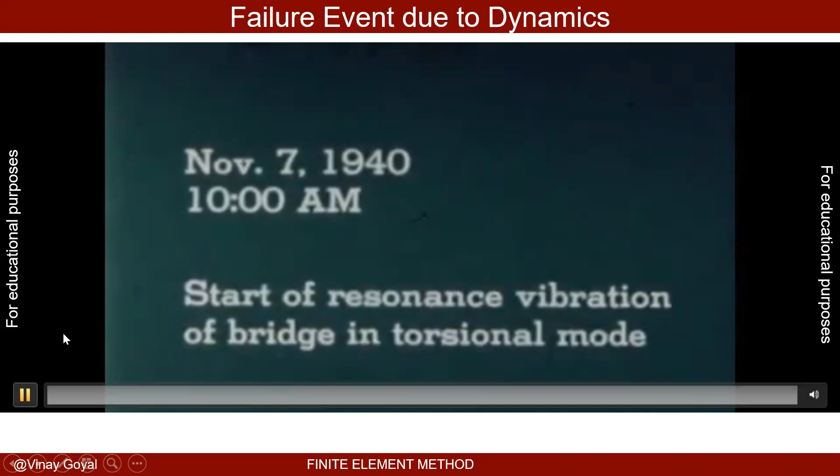And here what I'm going to do is talk about the Tacoma Bridge, which collapsed due to a flutter event. So let's look at this video really quick. And what we're going to see is a resonant vibration of the bridge in a torsional mode. In this case, the Tacoma Narrows Bridge collapsed as it experienced winds of about 19 meters per second, close to

Despite all this motion, the center part of the bridge was motionless, while the other two halves continued to twist in opposite directions. What we notice here is that there's a drastic torsional motion, which was started by a failure of a cable, and that basically increased in size. These amplitudes increased in size until cracks developed and the entire bridge crashed over.

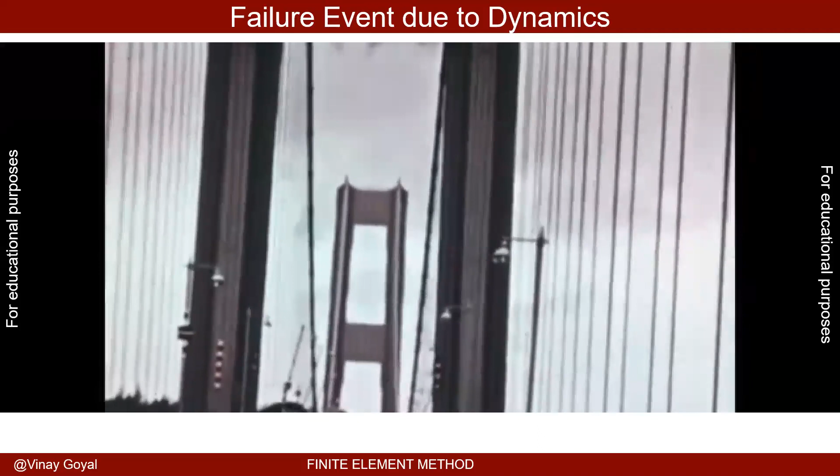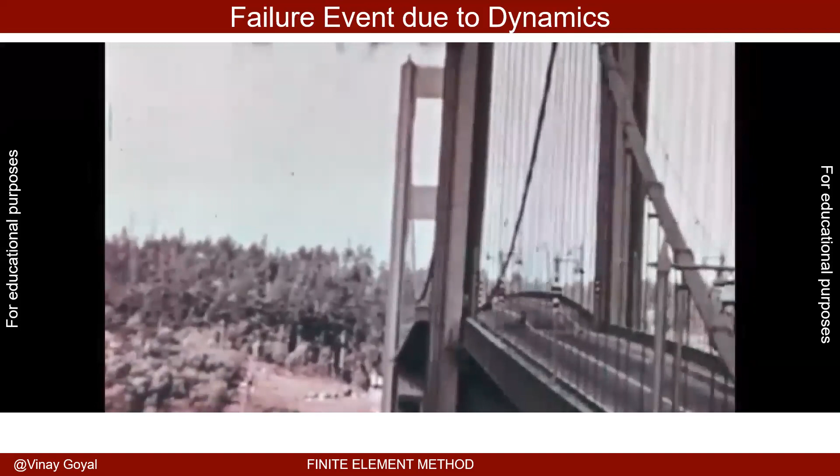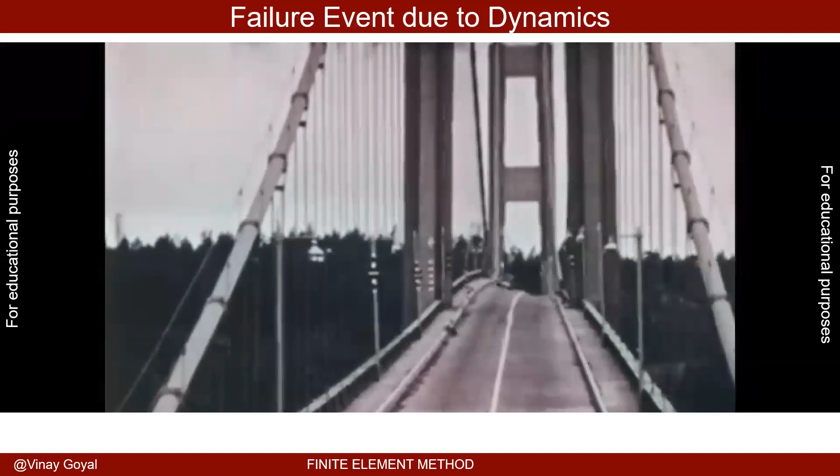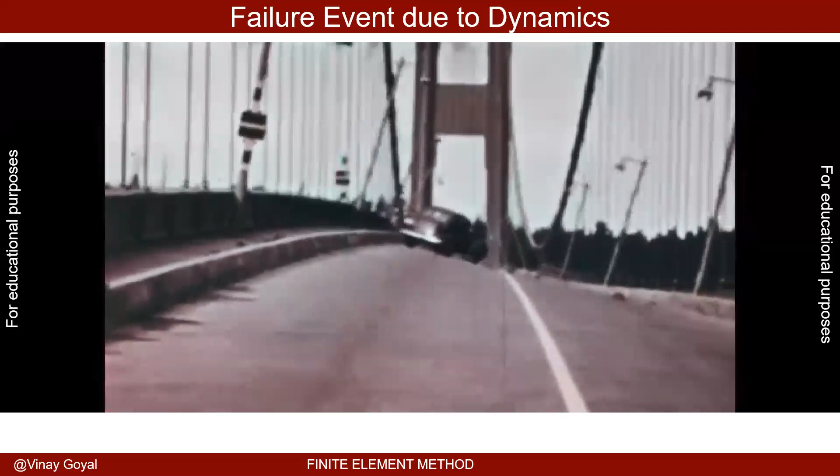Very, very powerful event that demonstrates how wind can couple with frequencies and dynamics of the bridge. And when they coupled, it can cause a resonant condition. In this case, what people have found is that wind-induced oscillations can occur and can be quite dramatic. There have been wind tunnel test experiments that usually can explain this type of failure. And this is what we call an aerodynamically unstable event. And this is not a new problem. It has occurred in other types of structures, but at the time, this factor was not considered here.

So what is the physics? You really have these vortex events that have frequency and that occur at certain frequencies or cycles per second. And the bridge will have a dynamic characteristic that can be described in terms of frequencies and mode shapes. And in essence, what we're talking about is the natural vibration of the structure due to excitation.

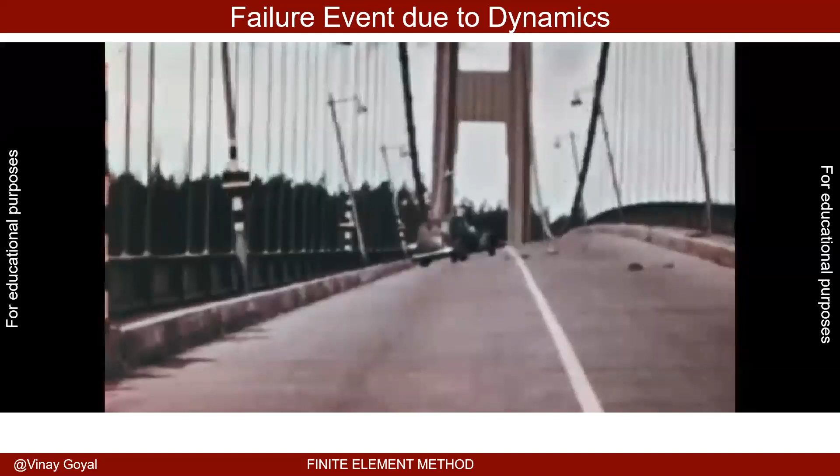Let's talk about the dynamic analysis. So we'll be discussing the transient dynamic analysis, but we're going to look at other methods of doing it because what we had discussed was the transient dynamic analysis with direct time integration. That's the very previous lecture. We can discretize the spatial domain using finite elements and integrate the equations of motion directly from some load time history. And I demonstrated that using the Newmark beta method.

We can solve for deflections, velocities, stresses as a function of time. The benefit of this approach is that it predicts the structural behavior due to time-varying excitation. The transient load excitation is explicitly defined in the time domain. It allows definition of applied forces and/or enforced motions and can be modeled nonlinear. It can model nonlinear behavior such as contact and plasticity.

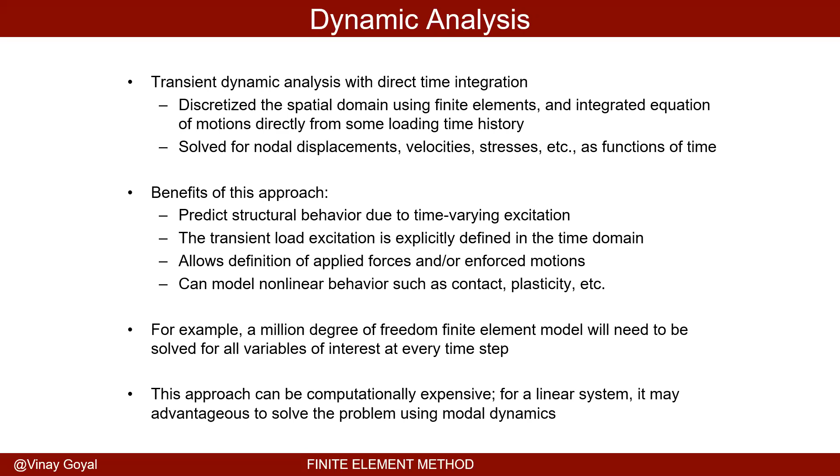For example, a million degree of freedom finite element model will need to be solved for all variables of interest at every time step. That's what we saw. So if I have a million degrees of freedom structure, I'm going to have to solve for all those variables as a function of time. And that can be quite computationally expensive. For a linear system, it may be more advantageous to solve the problem using modal dynamics. But before I can tackle that, we really need to understand the idea of frequency modal analysis.

The frequency modal analysis is a free vibration eigenvalue problem, and it allows us to determine the natural frequencies and normal modes. And then we can determine the transient response, and I'll discuss that later. We can actually determine the transient response using these normal modes. The motivation for free vibration problems is that it allows us to verify stiffness requirements. You may want to stay away from certain frequencies. And so you could use that. Modal identification and correlation to test.

So you have a representative model of the physical system, and you want to determine whether the dynamics of that model correlate well with the testing. To assess the dynamic interaction with another structural component. So I want to make sure that I don't have this coupling effect that we just saw in the bridge example. And we want to make sure we don't have a problem where, say, the frequencies of the forcing function coupled with the fundamental frequencies of the structure, and that in turn causes a resonant condition that can cause failure.

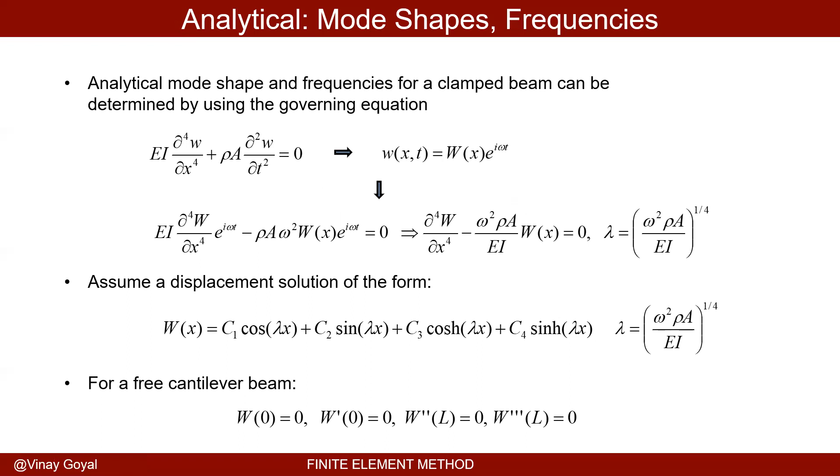So normally when you're trying to find modal frequencies and natural frequencies, you're not applying a force. You don't have a forcing function applied to it. You're trying to find the free modes of vibration.

So I don't have the distributed load here. This q is not here, and I'm not going to apply any forces at the boundaries. First of all, the boundary conditions at x equals 0 are such that v at 0 is 0, v prime at 0 is 0. But the shear and the moment are also 0.

So this whole thing vanishes, and I get this equation right here. So very simple equation, no distributed load, no forcing functions applied because I'm looking at the free vibration problem. And then the boundary conditions are such that all these boundary terms disappear because I have a clamped condition. If I want to examine a simply supported condition, for example, where it's pinned, then v at 0 is 0, v at L is 0, so this goes away. And then I have no moments applied, so this is also 0.

So it doesn't matter what you do in a free vibration problem, you're going to end up with an equation that looks like this. Very simple equation. And so that's the weak form from Galerkin, and I derived that in the previous lecture, and that's why I'm not doing it again. And notice how I can now use separation of variables. What I'll do is w tilde, the approximation function, will be equal to separation of variables that we'll be using. And N bold is only a function of x.

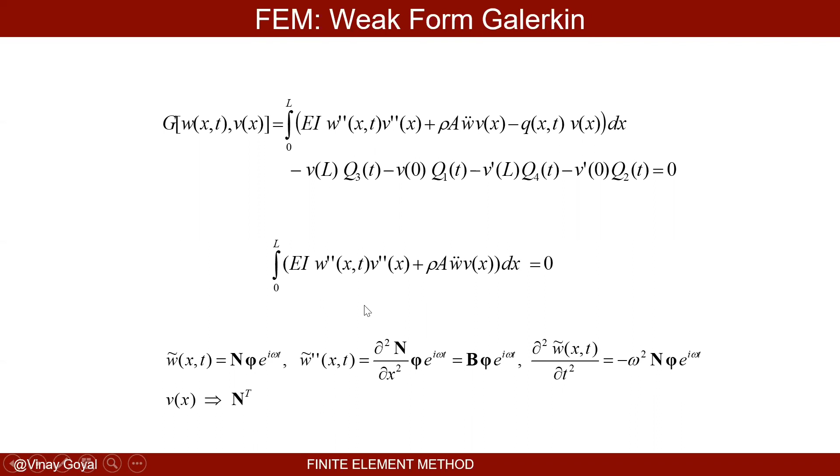And then in e to the i omega t, this is B bold, and then I have phi e to the i omega t. And the second derivative of w tilde with respect to time is minus omega squared N bold phi bold e to the i omega t. And so that's because the second derivative of w with respect to time is only applied to the e to the i omega t, and so that just results in this. And then anywhere I see v, I'll put it as N bold transpose. But I have a second derivative here that I need to take, so that'll become B bold transpose when I put it in there.

And so let's see what we got. We plug in the following approximations. I had to calculate this, and so I'll just plug it in. We just plug in these expressions. So this expression goes in here. This expression goes in there. That becomes B bold transpose. This expression goes in there. When I do all those substitutions, e to the i omega t factors out. And phi bold also factors out. You can see that here. And then omega squared does not depend on dx, so that can be factored out in this manner.

And notice how this is the stiffness matrix and this is the mass matrix. And note again here that phi is not a function of time. These are the nodal values that I don't know about. And notice that here phi is not a function of time and does represent the shape of the system. Okay, so that's the difference between what we did in the previous lecture, where I separated the variables. So it was w tilde of x comma t, N bold times a coefficient, nodal unknowns, which also depend on time. Here, I have taken phi bold and made it independent of time by doing these separation of variables. Now, phi bold does not depend on time. Big distinction between what we did before in the transient analysis versus what I'm doing here. So phi bold, again, has no dependence on time and no spatial dependence either, because the spatial dependence is taken care of by the shape functions.

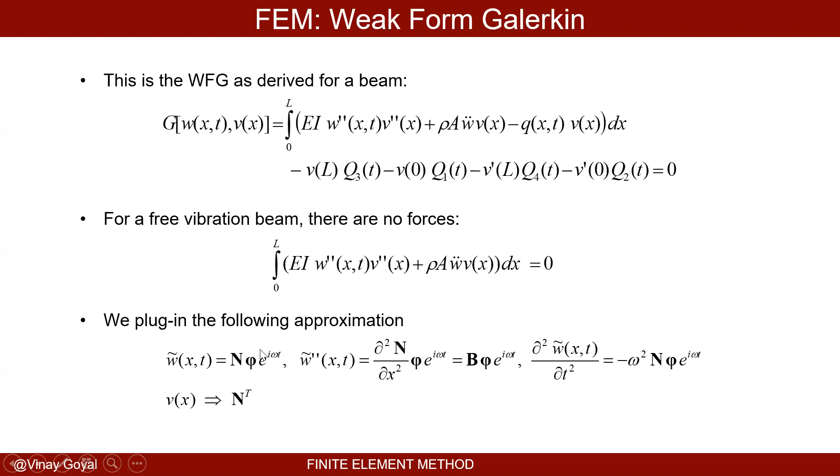The Hermitian cubic polynomials go here, and then phi bold is just nodal values that don't depend on time, because I separated the variables further and made an assumption that the behavior is harmonic. As a consequence, e to the i omega t can be canceled since that will never be equal to 0. And I get this equation.

So if I calculate these integrals here, which I did in the previous lecture, I get this right here. And if I plug it in for a single element, this is what I get. And phi is this column vector. Now notice in a transient solution, this also depends on time. But again, I decouple it further by assuming a harmonic solution here.

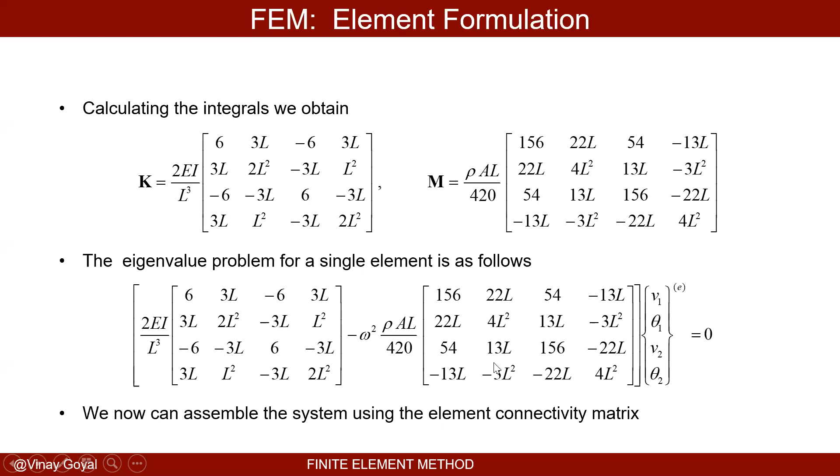So for a single element, this is what I get. If you had more than one element, you can assemble the whole thing together and get a bigger matrix. But this is what I have now. Since this is a clamped boundary condition, we can then apply this to be 0 and this is 0. And so these equations reduce to the bottom two equations. So I can look at these two equations.

And what I notice here is that I'll find a quadratic equation on omega squared. And there's only really two eigenvalue solutions to the problem. So, how do I find a quadratic equation? By setting this determinant equal to 0. And that will allow me to find the eigenfrequencies and corresponding mode shapes of the system.

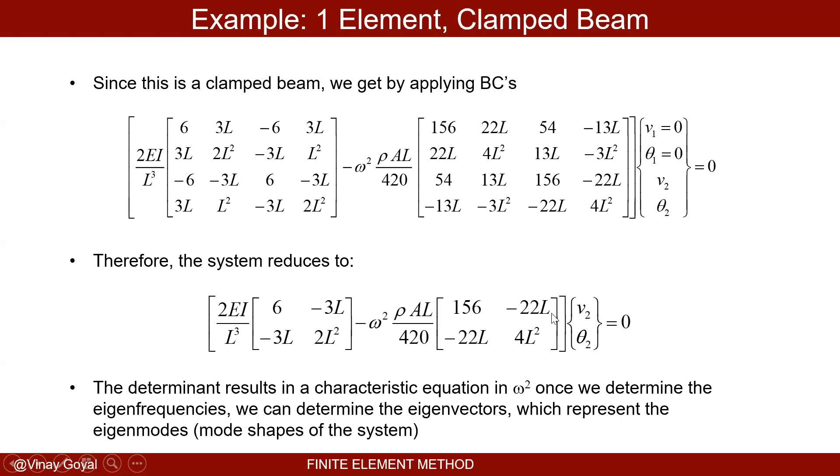If I assume E is aluminum, A is 1 inch squared, L is 20, I is this much, rho is this much, I can plug all that in to get this equation right here. So we can now use the quadratic equation and we can solve, by the way, Mathematica or MATLAB can find the eigenvalues. We can solve the equation stemming from this determinant, which will then give eigenvalues that look like this. So omega squared is this, so the frequency is 81 hertz. And then here I have 794 hertz.

So those are the mode shapes. And what that's telling me is that the system will vibrate at 81 cycles per second. That's the first frequency. The second frequency is 794 hertz, which is telling us that the system, or the beam, will vibrate at 794 cycles per second.

So how do I determine the mode shape? Once you determine omega squared, you can then determine the mode shapes. You can plug in this right here, this 2.56 times 10 to the 5, into this equation. And once I do that, I can calculate V2 and theta 2. You can solve V2 in terms of theta 2. And you'll find the eigenvector, which is what you get for the first mode shape.

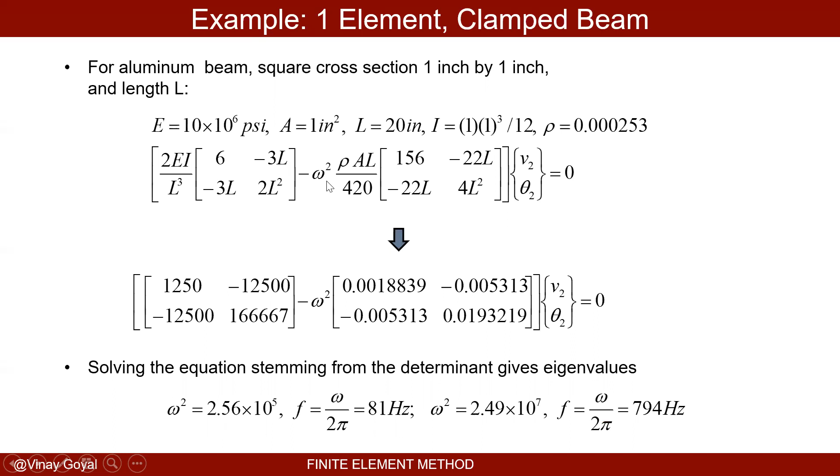For the second mode shape, you can do the same thing. Plug in this equation in here, and then solve V2 in terms of theta 2, and then you get this arbitrary mode shape. Again, it's arbitrary because V2 depends on theta 2, so you can scale it to whatever number you want. I invite you to do it so you can see for yourself that there's an infinite number of pairs of V2 and theta 2 that satisfy this equation, but there's only one way to make this work, which is that there's a factor of V2 that relates to theta 2.

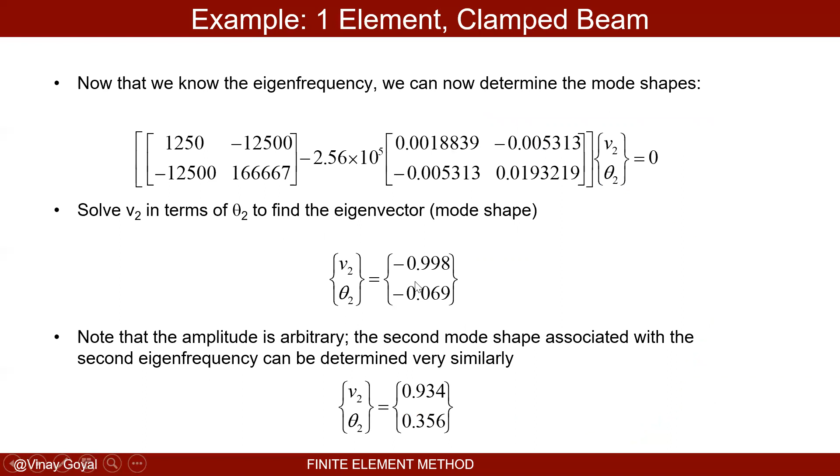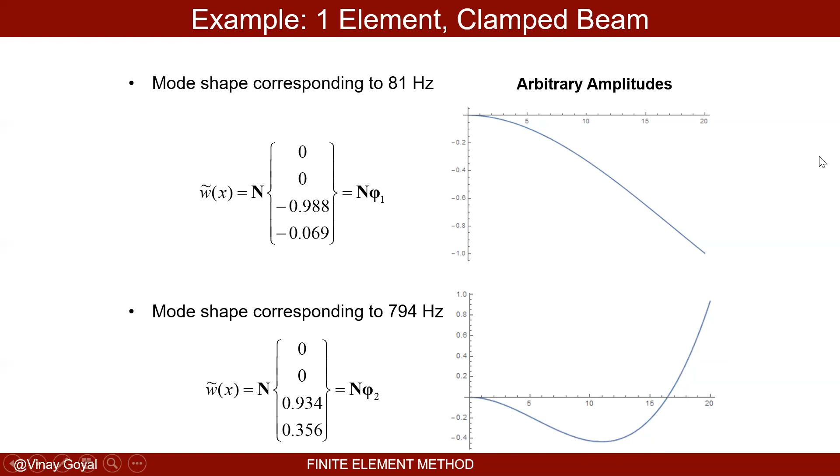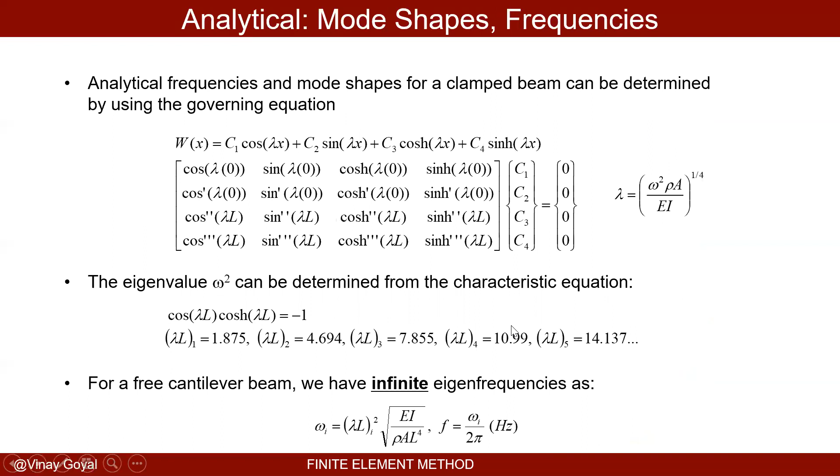So very interesting. I told you earlier how this analytical solution right here has an infinite number of eigenvalues. But because I discretized the domain into one element, I ended up in this case with two eigenvalues corresponding to two eigenmodes because I only have 2 degrees of freedom. So a system with n degrees of freedom will have n eigenfrequencies corresponding to n eigenmodes. That's in contrast to a continuous system, where you will have an infinite number of eigenfrequencies and mode shapes. The eigenmodes have arbitrary amplitude. Its amplitude is not known, only its shape. And the dynamic characteristics of the system are defined by these eigenmodes and frequencies.

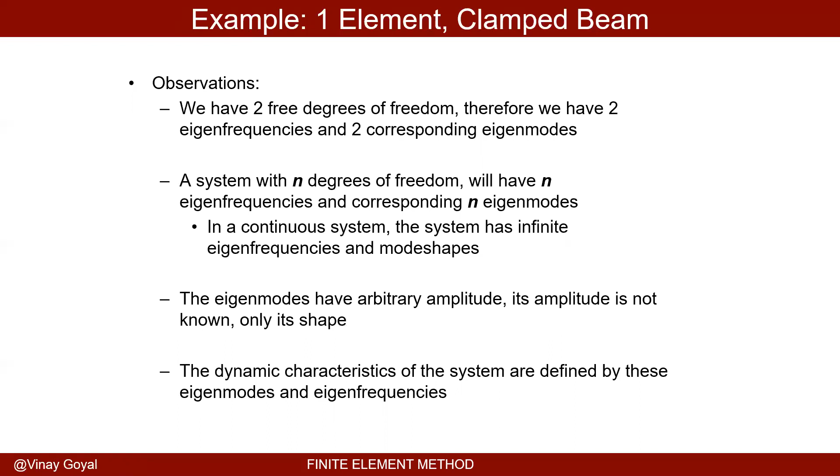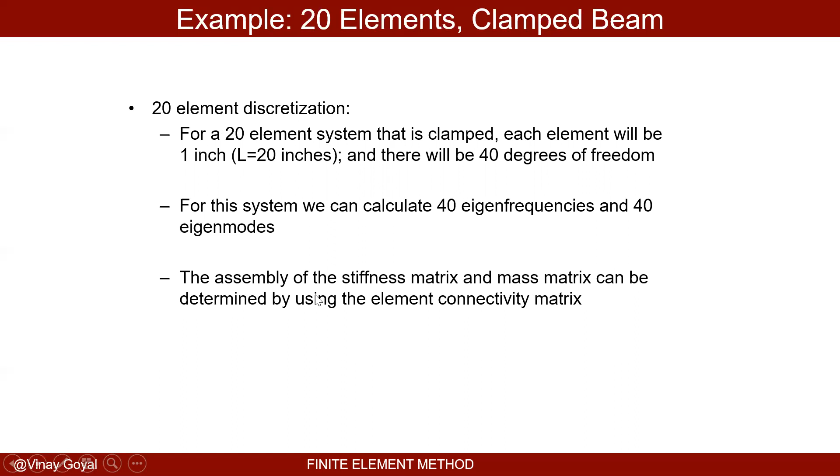If I were to have a 20 element clamped beam, each element will be 1 inch long, and there will be 40 degrees of freedom in this case. For this system, we calculate 40 eigenfrequencies and 40 eigenmodes. The assembly of the stiffness matrix and mass matrix can then be determined by using the element connectivity matrix. So when I assemble 20 elements, and I did it, this is what I get.

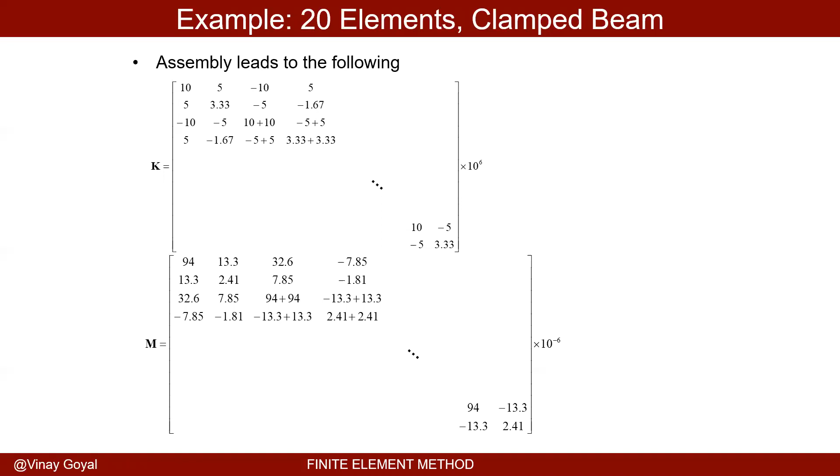And then I can use Mathematica or MATLAB to determine the eigenfrequencies and eigenmode shapes. I will have a lot of frequencies and mode shapes to look at. For one element, we got 81 hertz and 794 hertz using Mathematica. For 20 elements, notice how I got 81 hertz and 502 hertz.

Obviously, the first one looks pretty good. The second one, for one element versus 20 elements, is quite off. Obviously, one element will have a hard time representing the behavior correctly. But 20 elements, this is what we got. And I have many more frequencies than that, but I'm showing the top 6.

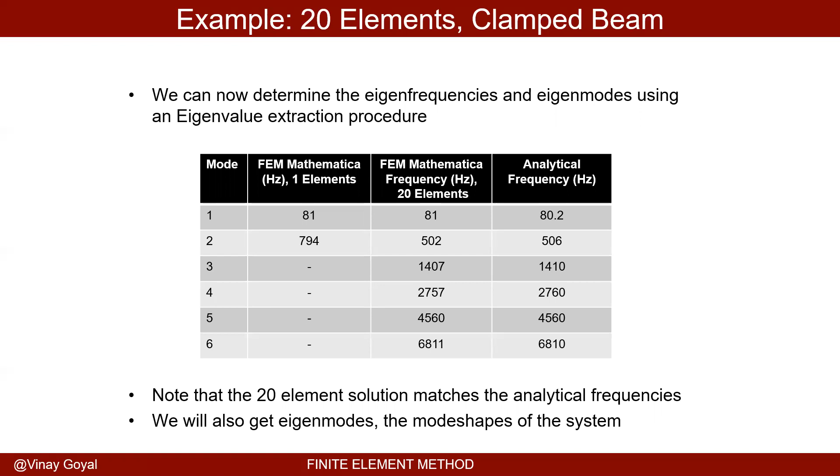How will you determine the mode shapes and frequencies, natural frequencies, using Abaqus? How do you extract that information from a model? Because that's very important in design to determine that. So how do you do that?

First, I recommend providing the node information, then the element definition. We're going to use the Euler-Bernoulli beam theory here. I'm not showing all the element definitions here. Then I provide the beam cross-section information, which is a 1-inch squared area, the elastic modulus, Poisson ratio, and density. You then extract, here I'm extracting 50 frequencies, and I'm clamping the left-hand side here.

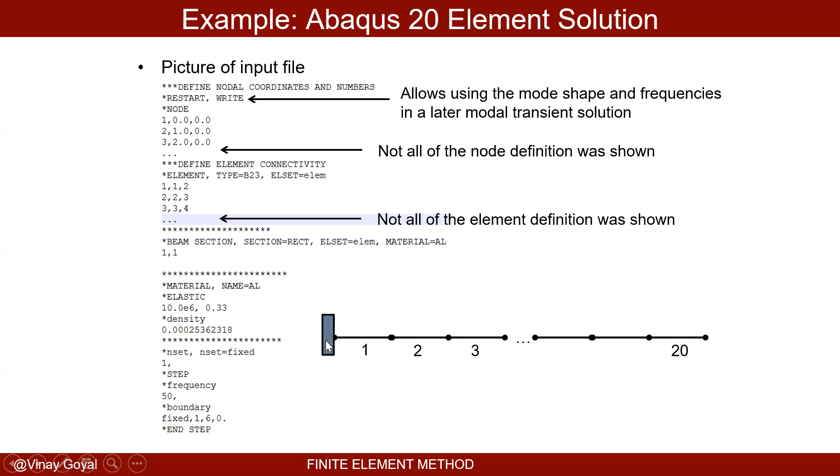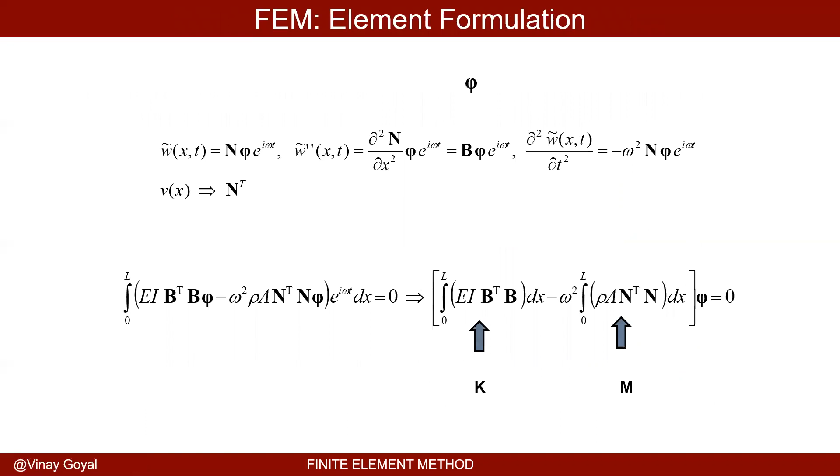The second mode shape looks a lot more complex, and it's going to take that shape if you were to vibrate at 502 hertz. The third mode shape looks even more complicated. The fifth mode shape looks like this, the sixth mode like that, and the seventh mode like that, and it gets more and more complex. You're going to have more half sine waves, and you will see that Abaqus produces an axial mode, which the formulation we have here did not include the ability to actually deform, but the one in Abaqus does, and that's why it produces this axial mode here. And if we were to include that in our formulation, we'll get the same thing.

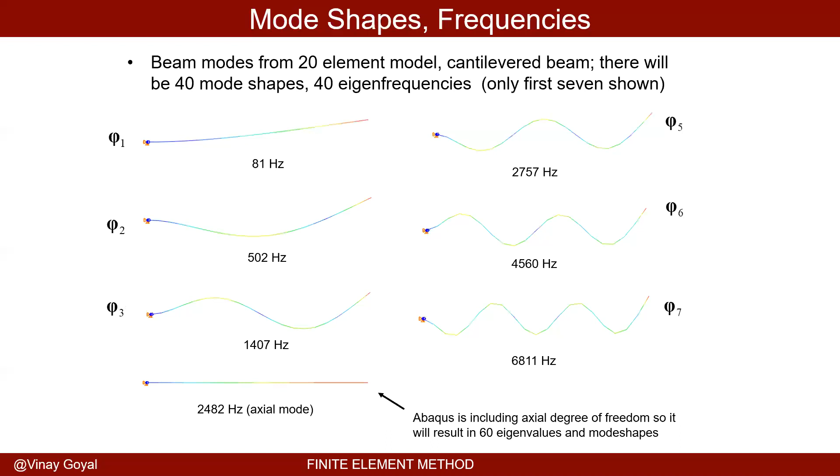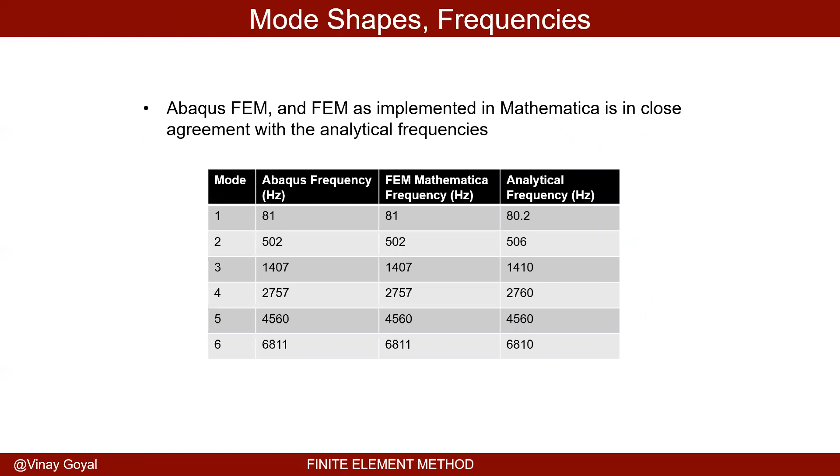So how does Abaqus compare to Mathematica and the analytical solution? You can see that the Mathematica solution matches exactly the Abaqus solution, and it's pretty close to the analytical solution. So in this lecture, what we've learned is a very important consideration: when we study dynamics, it's very useful to understand the dynamic characteristics of that structure, and how we characterize the dynamics, the DNA of that structure, is to understand the natural frequencies and corresponding mode shapes.

And what is a natural frequency? If it's basically a free vibration problem, with no damping and no forcing frequency, what I want to understand is if the structure were to vibrate at that frequency, what shape does it take? And what frequency is more likely to vibrate at? You can see here, these are the fundamental frequencies. This is the fundamental frequency, and you have natural frequencies at which that structure could vibrate. And it will take that motion if it did. And this number represents the number of cycles per second that will happen.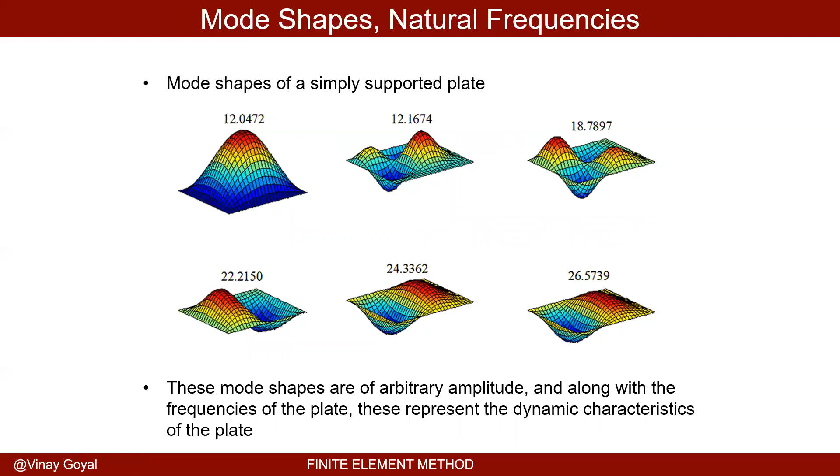If I put a crack here, for example, the stiffness will change. So I know that something happened to the structure, and I can study that frequency shift. It can be used for transient response analysis, and for design change evaluation. I'm going to be looking at transient response analysis coming up in the next lecture. But the point was to demonstrate why this is useful.

Why is this used? Another powerful way I'll show later is, say I have a structure that's tested to determine the mode shapes and natural frequencies. If I were to develop a model of that, I could then correlate the analysis to the test using something called model correlation. And I'll discuss that later. But this is very important. This is very useful information, and it's very powerful.